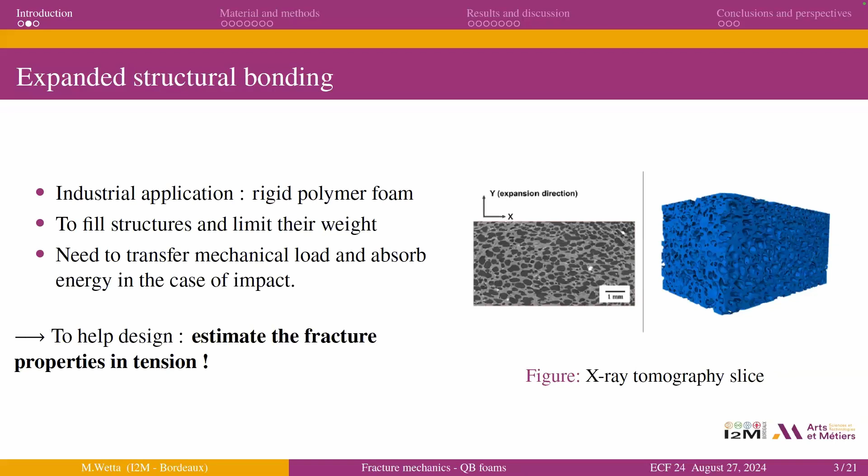And of course, as it is used for industrial application, this material needs to transfer mechanical load and is subjected to mechanical load from quasi-static to dynamic loading. And that is why, to help design, it's necessary to try to estimate the fracture properties, especially in tension. So how can we do that?

In the literature, we have some proposals for that. Of course, for cellular materials, you can follow the Gibson and Ashby concept and models. We have a strong link between the fracture toughness and the relative density, and of course, the cell wall properties and geometries. So that's an option.

Which works very well. Another option is to use the classical linear elastic fracture mechanics approach and formalism as for homogeneous materials. And as Marsavina and Linul did, it works very well too, even if you have a complex microstructure and heterogeneities.

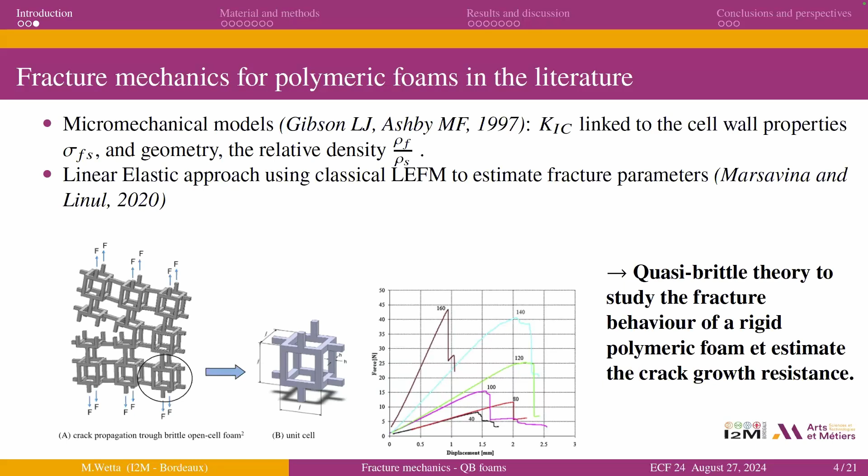So our work here is to propose an alternative. We will use a quasi-brittle approach, quasi-brittle theory, to study the fracture behavior of this complex microstructure polymer material and to estimate the crack growth resistance. In this presentation, I will only be focused on the quasi-static regime to study the crack growth resistance.

So the material in the study, from industrial application, is quite complex to have. So we have to manufacture laboratory materials. And for that, we are using a polymer sheet, which is expanded between two metallic plates. And by doing that, it is possible to have different densities with different boundary conditions. And finally, we have an expanded sheet of polymer, and it will be machined to have different specimen geometries.

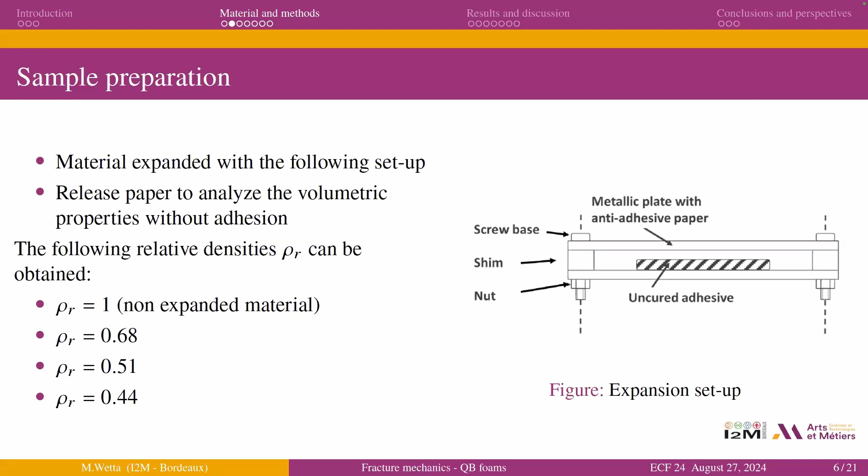So the microstructure has been, of course, characterized because it's quite complex. The microstructure is finally a little bit large because we have cells of about a few hundred microns. So it is possible to use laboratory X-ray tomography, and we can have good information about the microstructure and the cell size and orientation.

In our case, we have a gradient of the microstructure in the thickness, and we have observed that cells were shown to be more spherical in the core of the structure. So we have some skin-core effect. But if you want more information about that, we have a paper published on the link between the microstructure and the microscopic mechanical behavior.

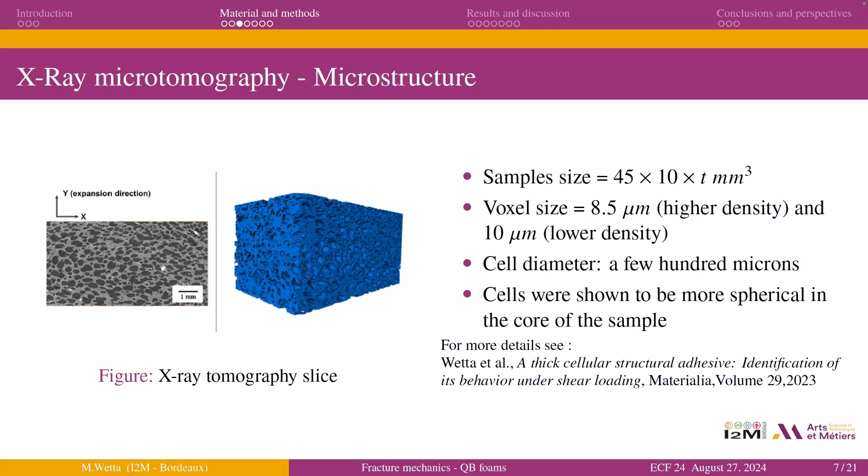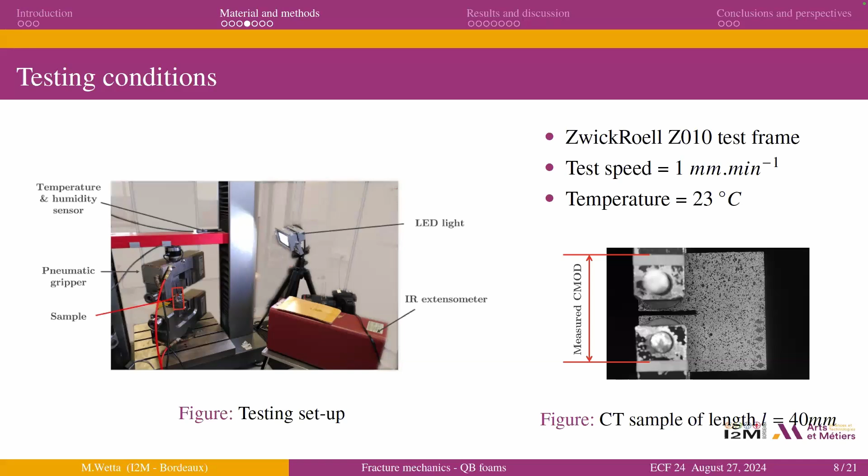So in this study, we have used a classical compact tension specimen, which is about 40 millimeters in length, at room temperature using a classical tensile testing machine in quasi-static regime. So it's very, very classical for this kind of study.

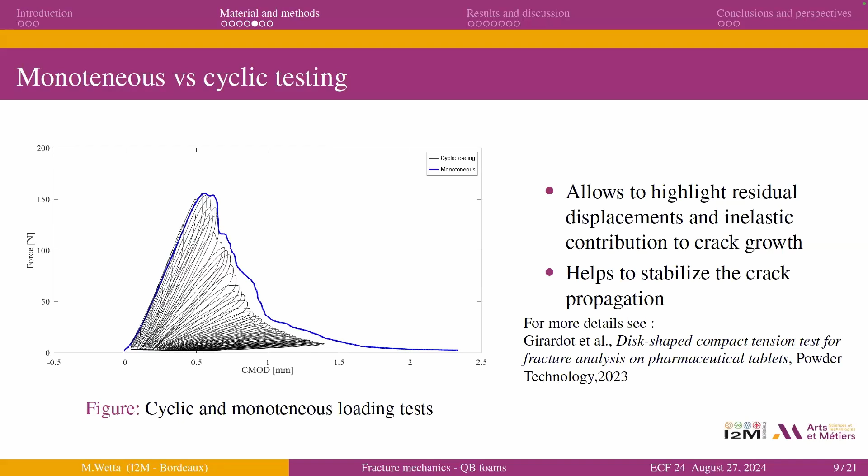For the specific loading, we compare a classical monotonic loading with cyclic testing because we made a previous work on other materials, and we have observed that the cycling helps to stabilize the crack propagation, of course, but the second reason is that the cycling helps to dissociate the energetic contribution, from elastic contribution to inelastic contribution. So you have a more rigorous analysis of the energetic contribution.

So to do that, we dissociate the blue and the red area. The blue is considered the elastic energy, which is estimated between two different stiffnesses, because when you reload the crack, you have a good estimate of the elastic stiffness. So between these two different stiffnesses at each step, it is possible to have a good estimate of the elastic energy consumed by the crack during its propagation.

And the other contribution, which is the inelastic contribution, is obtained with the maximum displacement. And it is the red area just presented here.

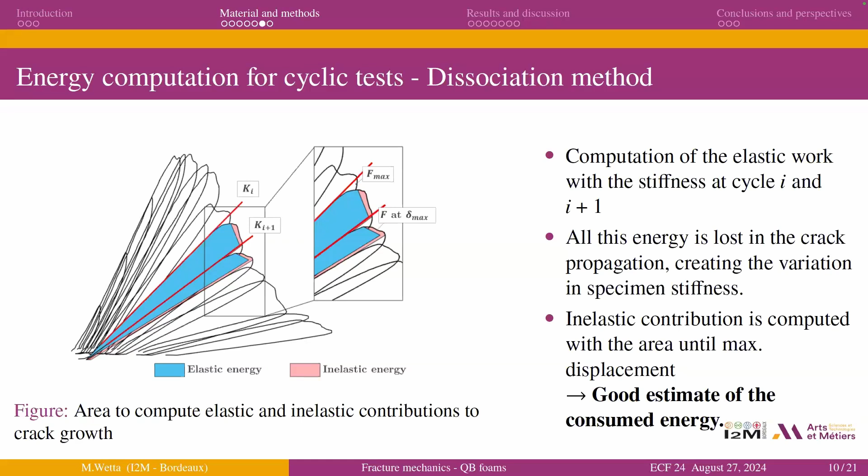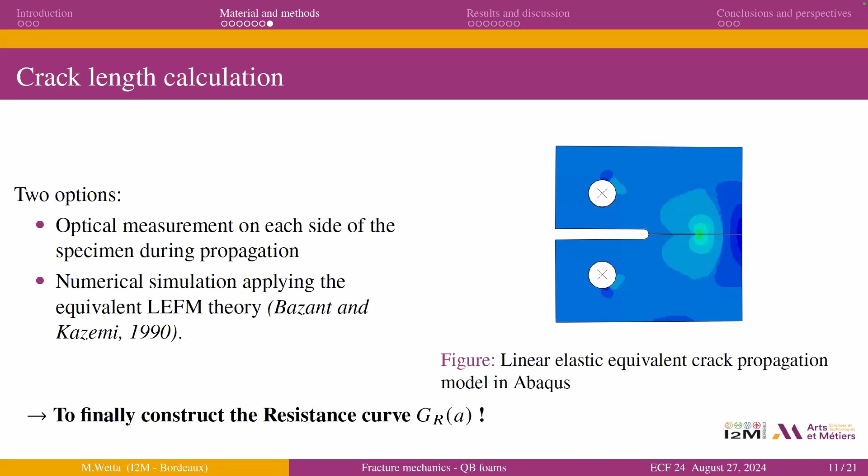So by doing that, by cycling, you have a good estimate of the consumed energy. And the last thing we need to construct the resistance curve is the crack length calculation. For that, we have two options. The first one is the experimental possibility. For that, we made some optical measurements on each side of the specimen. And the other possibility is to apply the equivalent LEFM theory to estimate the linear elastic equivalent crack length by numerical simulation. And finally, if you have both these parameters, you can construct the resistance curve.

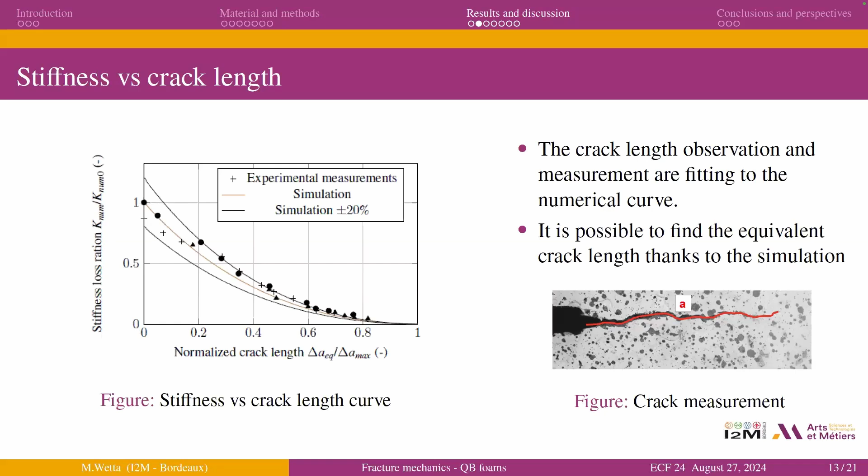The other result concerned the monotonous loading. So we have compared several classical methods: the standards with the maximum load, the global area under the monotonous loading force-displacement curve, and the compliance. We have observed that whatever the density, we have a comparable value of the fracture energy, GF.

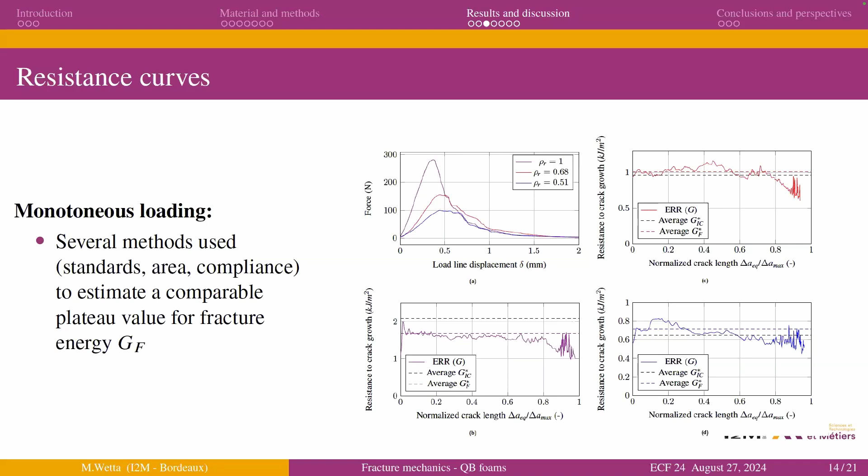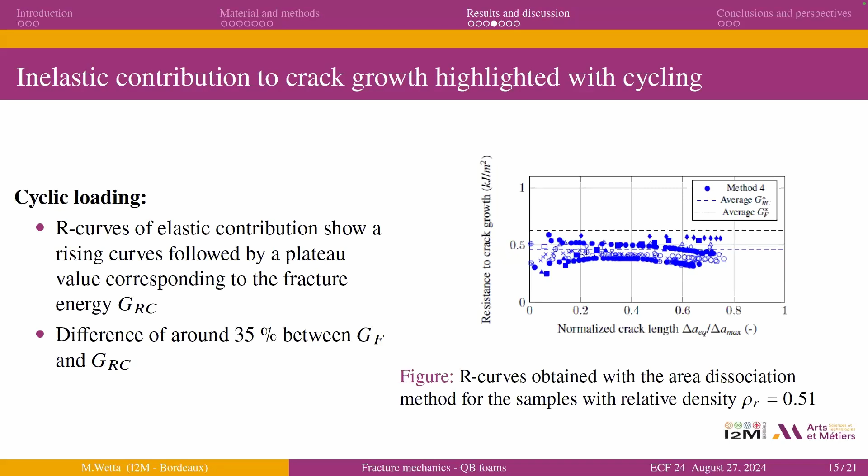And when we compare with the cyclic loading, we construct the resistance curve with the elastic part of the energy, and we can observe that we can reach a plateau value, which is quite different from the fracture energy measured before with the monotonous one. So we can observe that we have a difference of approximately 35%. And this difference is directly explained by the inelastic part of the energy.

So that's interesting because the inelastic contribution corresponds directly to the difference between the fracture energy and the other estimate with the elastic part. So that means that this contribution is characteristic of a specific mechanism, which is not directly correlated to the crack propagation, which is probably small-scale plasticity or friction between the crack surfaces.

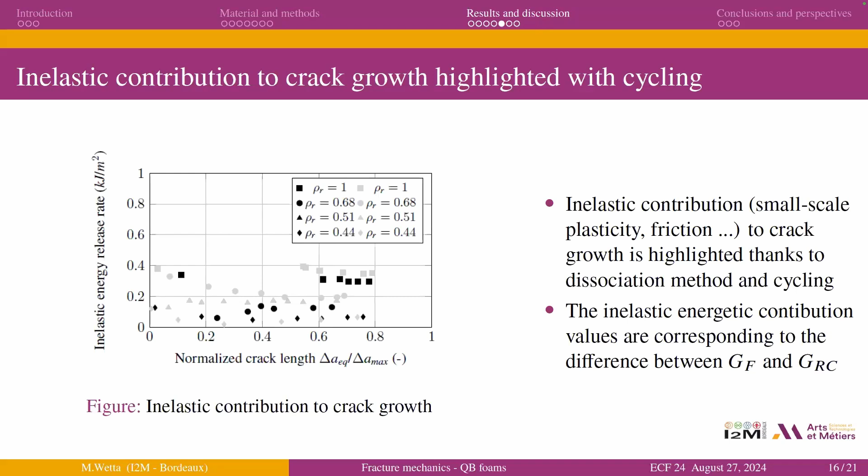So another piece of information, which is probably linked, is about the fractographic analysis. When we observe the fracture surface, we have an example here with a density just presented there. The first observation is that the crack front seems to be relatively straight through the thickness. So it's a good observation, even if the cell geometry is not quite homogeneous.

Another observation concerns the topology of the fracture surface, which is quite complex. This complex topology for cellular materials highlights some roughness, even if it's cellular materials. We can postulate that this complex topology is probably linked to the inelastic mechanisms like small-scale plasticity or friction, even if the role of heterogeneities could explain bifurcation of the main crack front.

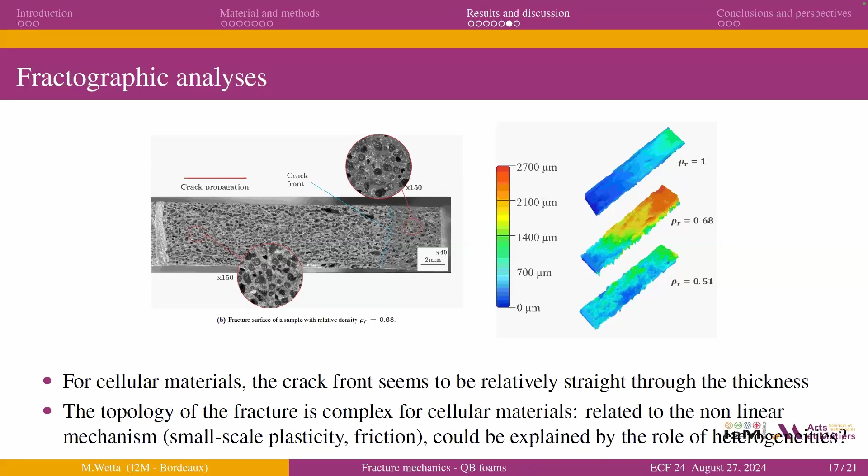So the last result concerned the diagram and the evolution of the fracture energy as a function of the relative density. As expected, we have a good link between the fracture toughness and the relative density. So the relative density explains very well the increase of the fracture energy, as Ashby and Gibson highlighted before. And the difference compared to the literature data is probably explained by the inelastic part, which most of the time is not taken into account.

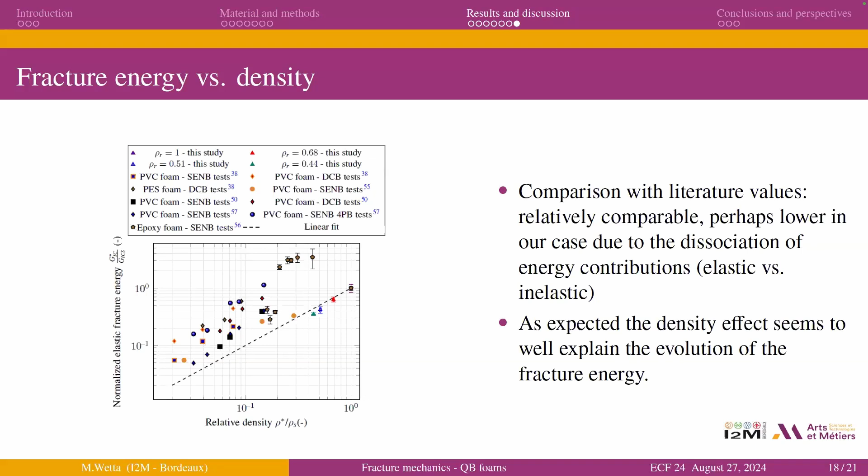So to conclude this presentation, we can say that for this complex material, even if we have a complex microstructure, a polymeric nature and nonlinear phenomena, the quasi-brittle approach seems to be relevant for describing the fracture behavior and the crack growth resistance. Another conclusion concerns the cyclic loading, which seems to be interesting to dissociate inelastic and elastic contributions, which helps to describe more rigorously the physical mechanisms involved in the cracking process.

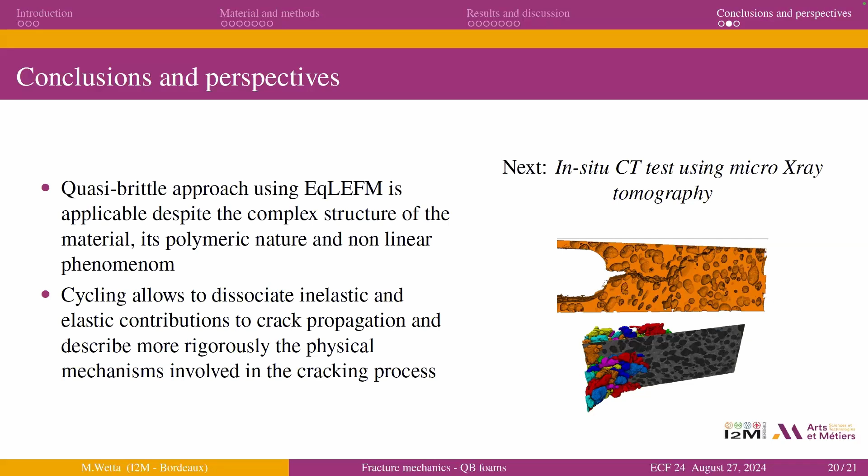A next work, which is in fact still in progress, is to try to understand the role of the cells in the cracking process. And for that, we have made some in situ X-ray tomography fracture tests.